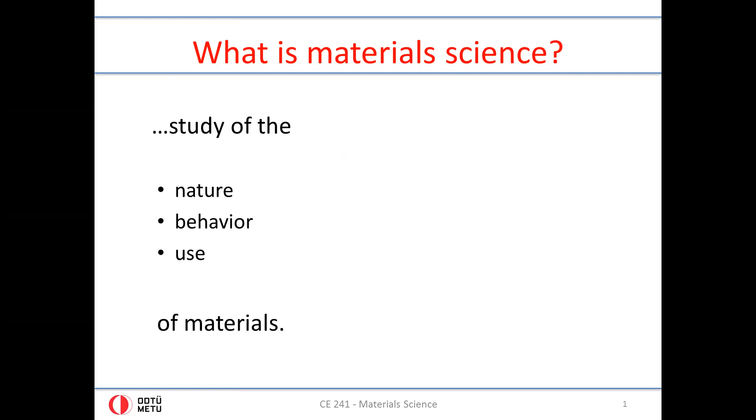So materials engineering is related, but slightly different, in that it could be defined as designing or engineering the internal structure, meaning perhaps the atomic or molecular level structure of a material, to produce intended, predetermined properties that we would desire. And material design or materials engineering incorporates materials, mechanics, and management.

Materials would be perhaps closer to chemistry, geology, environmental engineering, if you thought of it as what departments deal with. Mechanics would be more based on physics and math, and management would be more based on perhaps economics.

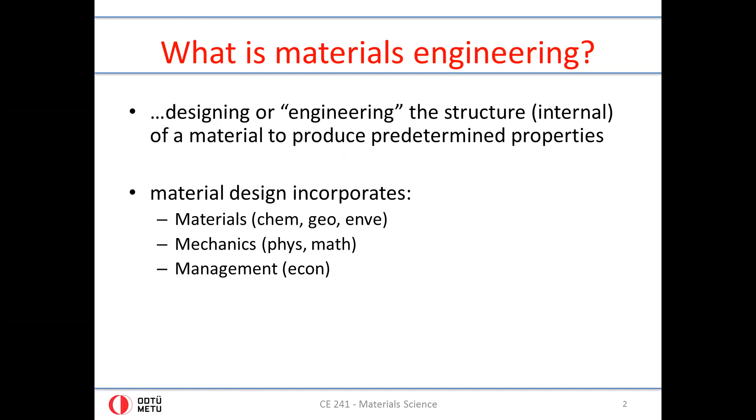And the major themes of processing, structure, properties, and performance are all related with each other, such that one depends on the previous. So performance depends on properties, properties depend on structure, atomic or internal structure, and internal structure depends on your processing, which is part of your design of a material.

So you could create with the same material, similar to baking a cake, a different end product because it would have a different structure, and having a different structure would give it different properties, and that would define where it could be used for a given material.

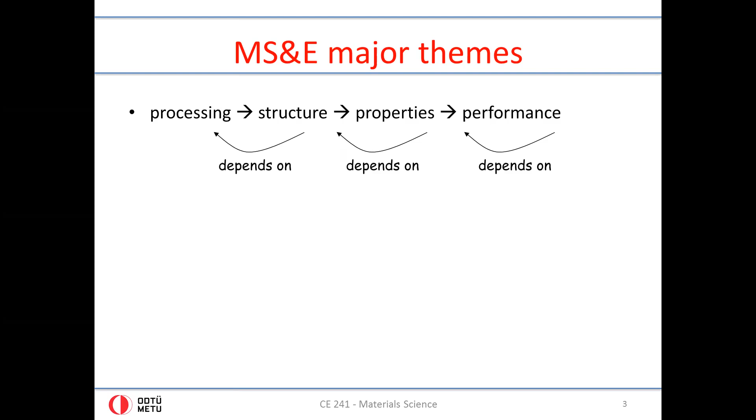And a big part of materials is how to select them, and this is what an engineer typically does more than design. So fewer people deal with designing new, novel materials, but most engineers often every day have to deal with choosing the right material for a given job.

So material properties determine the capabilities of a device, a structure, what have you. In addition, it could influence how it could be made, the technique with which it could be made.

So, for example, a civil engineering structure needs to be functional and safe. It should do what it is intended to do, and it should do this safely, during its service life. The service life could be described as the lifetime of the structure during which it needs to be able to do what you want it to do. So if the structure stops being functional, that means it cannot adequately perform the task that it needs to perform - it could maybe perform it partly, but not fully.

So this, of course, not only depends on the design, but also on how something is built, based on labor, and that requires quality control. So it's a very complicated concept, a complicated field, perhaps.

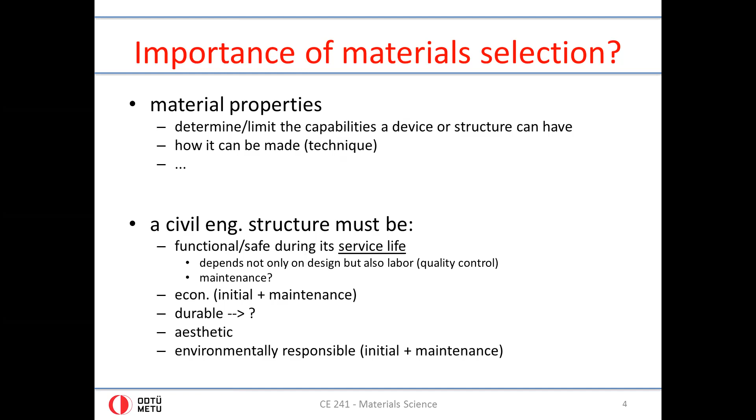And in addition, of course, although it might seem less important, it is pretty important that an engineering structure be aesthetic if possible. And of course, more so in the last few decades, it must be environmentally responsible - again, initially, and later on in its lifetime.

So then material selection often requires that you have a trade-off between different properties. So one might imagine wanting both a stretchy and a strong material, or both a strong and a lightweight material for a job. So for the outside of your car, you would want it to be strong, but also lightweight. And you will see that being lightweight and being strong is difficult to have together.

So often you will need to sacrifice one property partly to be able to gain in the other property. In terms of cost,

the cost of, for example, a residential building, a building that people live in, has maybe 70% of it in the materials used. So this is quite significant when you think about it. The remaining 30% has the money paid to the people designing it and the people actually building it with these materials. So cost is an important issue in material selection.

And then operating conditions are important, and they can be different for different engineering structures. So for a building and for an engine, you might imagine that operating conditions are tremendously different. In an engine, you might have higher temperature exposure than a building. A building might be exposed to, say, from -20 to +50, whereas an engine might be, in certain cases, subject to several hundred degrees centigrade temperature. So operating conditions influence what material you can select for a given project.

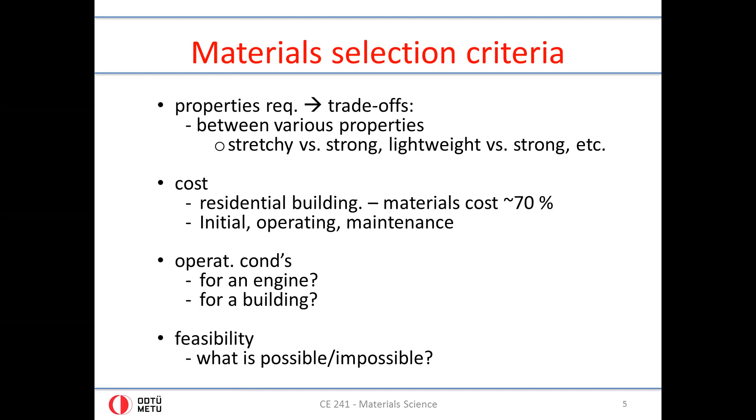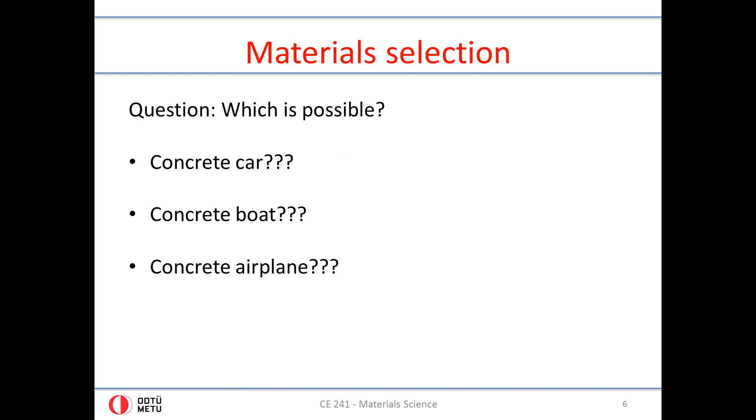So this slide shows 3 examples of concrete being used for a boat, a plane, and a car. Although here, I must confess that these are bizarre examples and they're not common examples. This is the boat, built in front of the civil engineering department in the parking lot - you might have noticed this over the years. This is when it was being built in the 1970s. This is an actual plane, a model airplane built out of concrete that was able to take off and land safely. But realize that this is a model airplane, so it would be very difficult at the moment to imagine a full-sized airplane made out of concrete.

There, the main problem would be that it would be very heavy. And even if you could get it off the ground, it would be very uneconomical. And then in addition, you would have certain other problems. So for a boat, it would be a little more realistic, because in a boat, much of the weight is being carried by the water. And so being very dense or being very heavy is not an issue. You might imagine that real common large ships these days are built with steel.

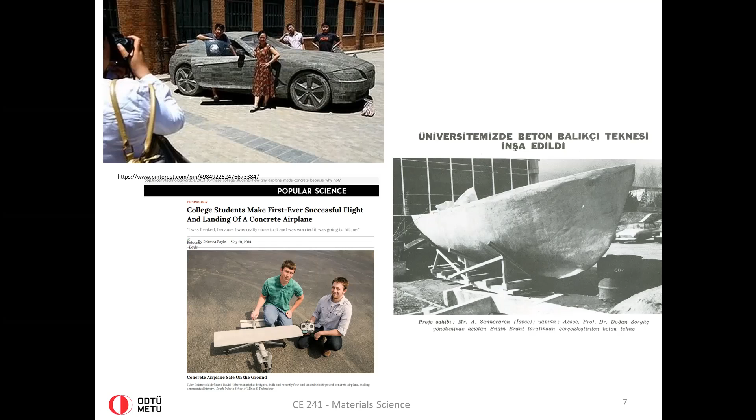So then, what we'll learn and discuss in the course are on this slide: internal structure of materials, as I mentioned, atomic structure and atomic bonds, or bonds between atoms. There will be a little repetition of first year chemistry, but there will be a new perhaps angle, or maybe we'll try to add a little bit to your existing knowledge of chemical bonding. And then we'll discuss certain properties of materials - here, a few examples are provided. We'll also talk about how internal structure influences properties.

So the link between structures and properties. This general discussion would allow you, at the end of the course, to answer these questions.

For example, why does a given material tear, but another material, instead of tearing, bend? Similarly, why does a material crack and break when you try to change its shape, while another material would not crack and break, but would bend and stay bent?

So if you were to take an aluminum foil, a sheet of aluminum foil from the kitchen, and try to crumple it into a small ball, you'd see it behaves similar to a piece of paper, but not similar to, say, a certain type of plastic.

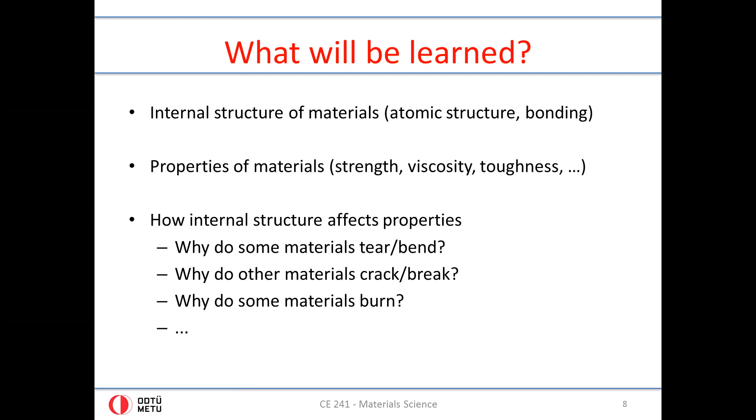So there are lots of these different behavior types, which depend on properties of the material, which in turn depend on their internal structure, making it important to understand what these differences between internal structures of materials may be.

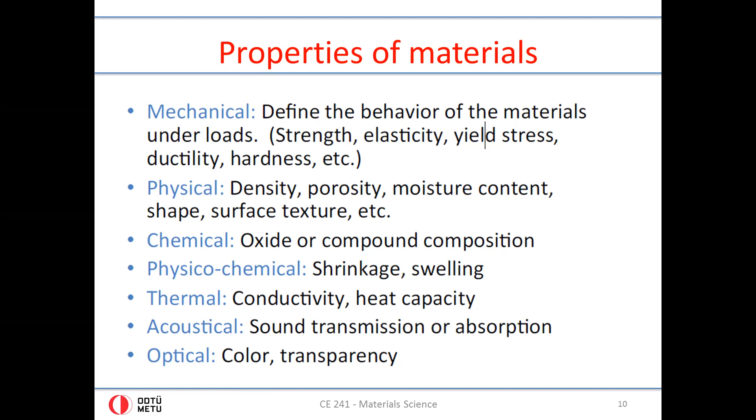So you see there are a lot of properties. A course like this one would not discuss all of them. In this particular course, in the second half we discuss various mechanical properties, and perhaps some physical properties, more so than the others.

As an example of how to classify materials, you could do this by state of the material, by intended use, by mechanical behavior type, or by chemical composition and internal structure, or by many other ways. So when you try to classify materials, there is no single way of doing this.

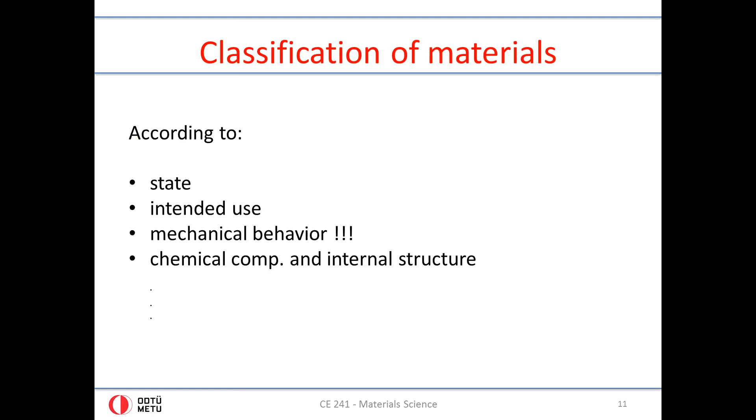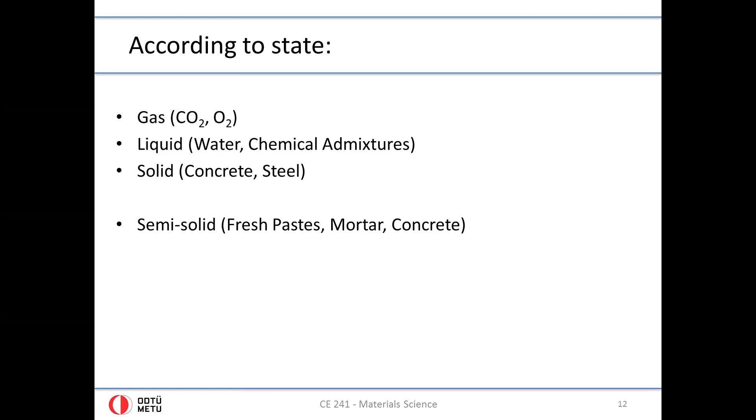According to state, simply you have gas, liquid, solid, but certain materials may, in certain parts of their lives, behave as a combination of these. A semi-solid is what you get when you mix cement powder with water until it solidifies—acting in some ways like a solid and in some other ways like a liquid, hence not being a true member of either category. It deserves its own category.

According to chemical composition is a common way of categorizing materials. Common examples of these categories are metals, polymers, ceramics, and some additional categories you might hear about are semiconductors, biomaterials, composite materials, or reinforced composites.

Metals are those that have metallic bonds, from first-year chemistry. Metals can have subcategories of ferrous, meaning iron-bearing, such as iron or its alloy with certain other elements like steel, or non-ferrous, such as aluminum.

Polymers are materials with long chain molecules by definition, and they can be artificial or natural. Natural examples are natural rubber from the rubber tree, certain resins, and wood. Wood and artificial plastics we use in everyday life share many properties and show similarities because they are all members of the polymer category.

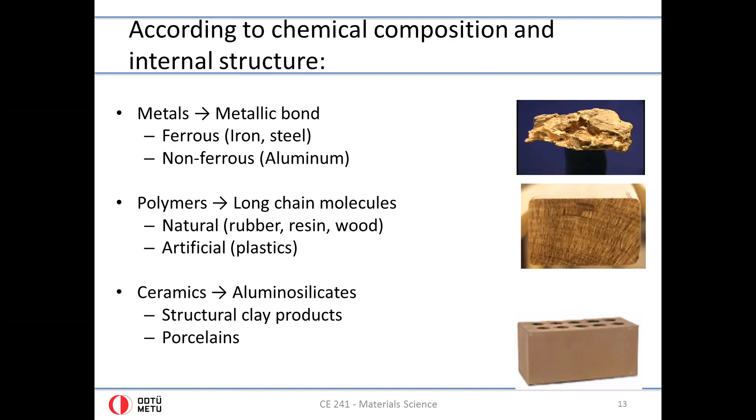If you can classify something as a polymer, then it is very likely that it's not going to be very resistant to high temperatures. But if you can conversely classify an unknown new material as a ceramic, having ceramic properties by nature, then it will be resistant to high temperatures like a brick would be. So you might ask, can my porcelain plate at home resist high temperatures? The fact that it is a ceramic indicates that it should be able to.

Composite materials is an additional category because it's, by definition, a combination of different materials. Concrete is an example of this, where you have rocks, cement, and water combined. Here the combination of several materials is generally done intentionally to give the final composite material better properties than either of the parent materials.

So a combination that gives an improved overall behavior, and certain reinforced composite materials like reinforced concrete, concrete with steel bars inside.

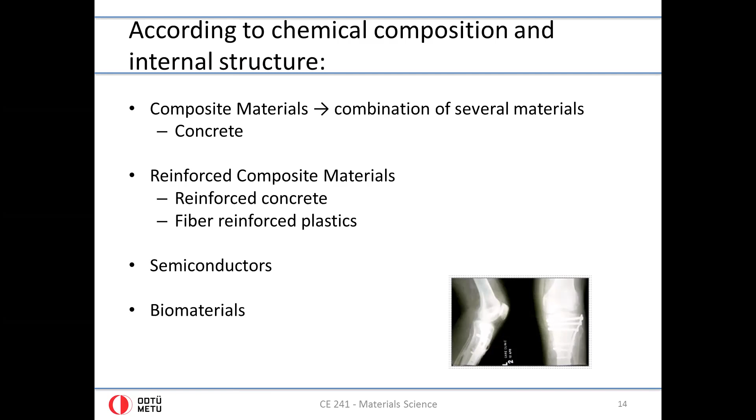Categorizing materials: some like concrete, steel, and even wood are structural materials intended to carry loads, whereas materials like paint or certain insulation materials can be architectural materials. Some materials can be members of different categories. For example, preservation materials would commonly include paint, which can be an architectural material and also a preservation material.

Glass could also be a structural material in certain places, in addition to being architectural. Wood can fall into more than one category: as a load-carrying member, as an architectural member, in some cases as an aesthetic member, and in some cases as a coating on chipboard. A chipboard is a layered board made with wood chips, so the wood coating might be used to preserve whatever is behind it. So materials can be members of various categories.

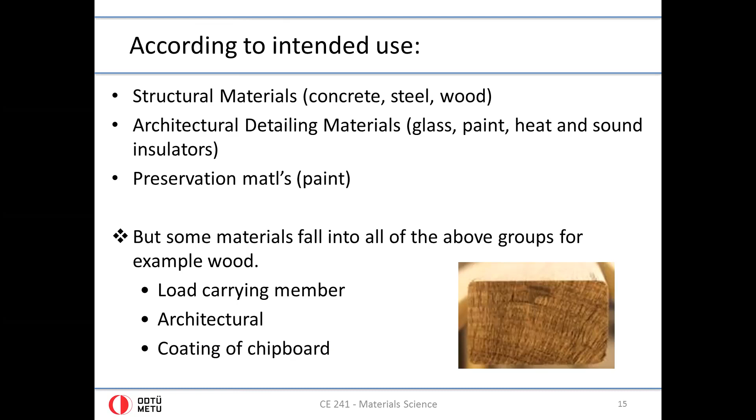More importantly for this course is classification according to mechanical behavior. Under mechanical behavior, there is an input of load or force, and we look at the output, how the material responds.

Some materials deform and return to their original shape when you apply and remove a load on them. If you push on something and remove the effect, or pull on something like a rubber band and let go, it becomes longer and then shorter again after removing the load. Whereas certain materials, like a plastic bag, lengthen when you apply a force, but when you remove the load, it stays deformed in its new, longer length.

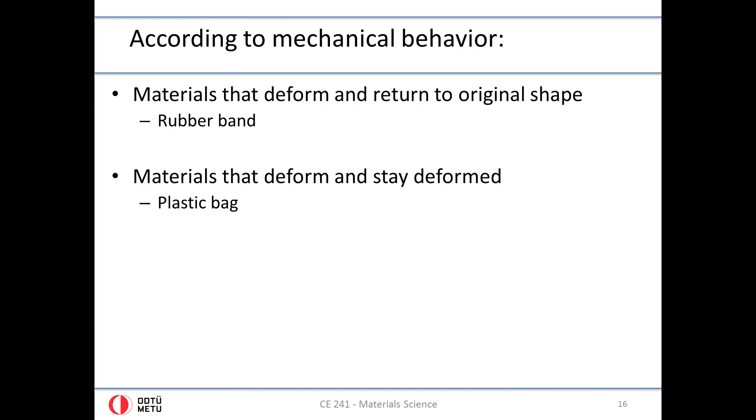Because of this, you might imagine that a rubber band and a plastic bag must have differences in their internal structures that actually cause this difference.

There are some materials that deform in bizarre ways, common examples being when the material behavior is dependent on temperature or time more significantly than for a lot of common materials. Asphalt, the black material you see on roads, is such an example.

On a hot day, asphalt being strongly dependent on temperature, when exposed to heavy loads such as the wheels of an airplane, may become soft enough to be indented, particularly because of the high temperature and time dependence, since parking a plane on asphalt means continued long-term application of a heavy load in high temperature.

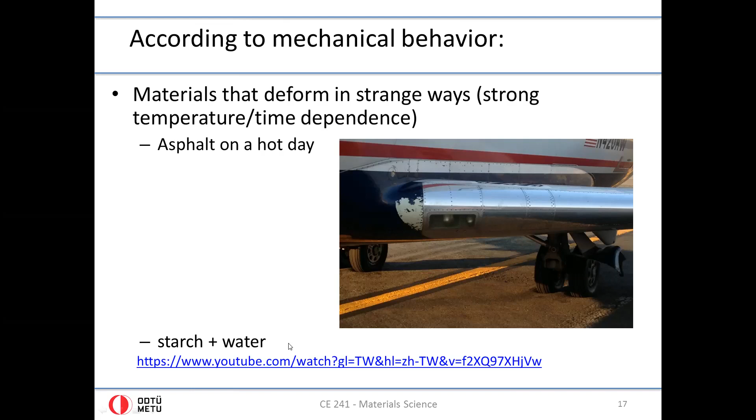When you're trying to push this pudding rapidly, when you punch it, or when you try to jump onto this pudding, because the loading rate, the application of the load, is so short or sudden, the material behaves like a solid. But if you push slowly, or don't jump onto this starch and water suspension, it behaves differently because the loading rate changes. So asphalt on a hot day has a strong temperature dependence and a time dependence, and starch plus water has a strong time dependence, in that whether you apply the same load slowly or quickly influences the behavior you observe.

Now, what are some modern material needs? Lower environmental impact is one, becoming increasingly important. And of course, trying to get more sophisticated engineering materials with better technical properties.

As I said earlier, having low density and high strength combined is difficult, because generally the internal structure that provides high strength does not provide low density. Generally, the denser you are, the stronger you are. Because of this, people now are demanding even lighter, lower density materials with high enough strength to perform certain jobs. High temperature resistance is another one of these needs.

As a strange example, I had read that certain automobile companies have for a long time been working on ceramic engines instead of metallic engines. But the problem with ceramic is that your porcelain plate is a ceramic, and when you drop your plate on the floor, it breaks. This is a very bad property for an engine. A car engine or a plane engine should not break easily. But an engine needs to be resistant to high temperatures, and the higher the temperature can be, the more efficient the process generally becomes.

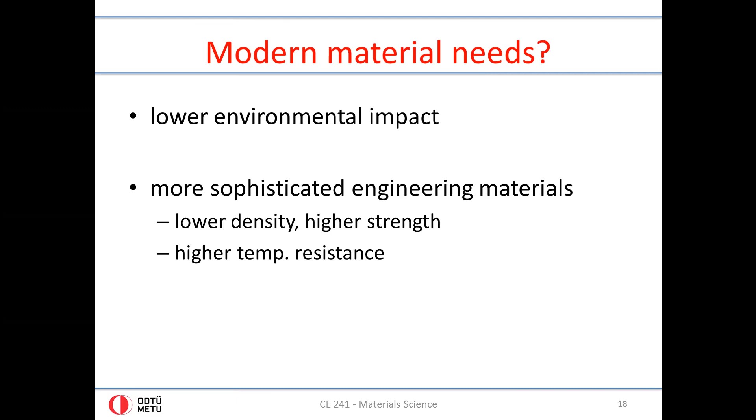Final words: every engineer, whether mechanical, environmental, civil, etc., will have to deal with a material problem or a design problem involving materials at some point. You will always have the option of choosing the known and easy solution, but there may be cases in which there is an alternate solution, one that is better than what is commonly known and recommended to you by, say, your colleagues or your boss.

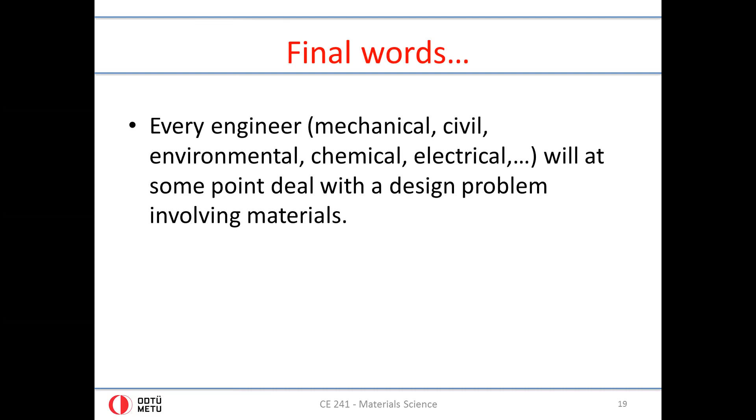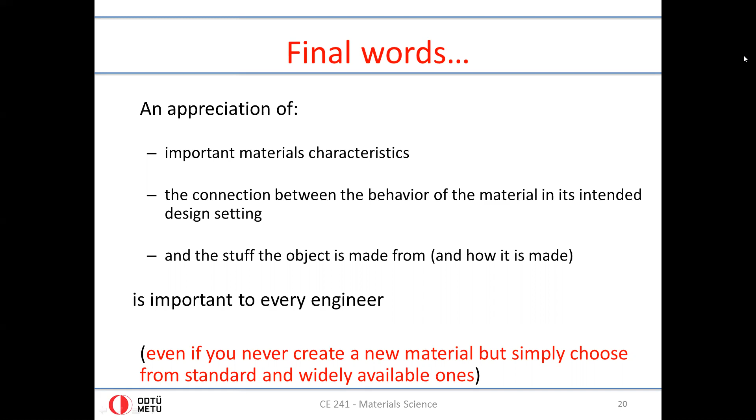But to be able to choose that, you'll need some basic understanding of what material properties are linked to what internal factors, internal structure. An appreciation of material characteristics, the connection between the behavior of materials in its intended design setting and what an object is actually made of and how it's produced, is important to every engineer. So even if you never create a new material, but simply choose from a standard set of available materials, you need to choose wisely. To do that, you need at least a basic understanding of what the material is made of, how it is made, etc., to choose the most economical and most technically suitable material.